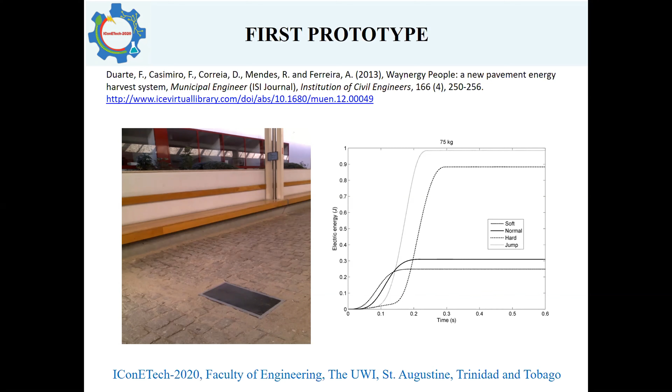In this figure, we can see a person with 75 kilograms and different values for the electrical energy generated by a soft walk, a normal walk, hard walk, and jump. And we published this in a Web of Science journal, before the project.

Then we developed a second prototype, this one for vehicles. It was called Waynergy Vehicles, also for generating electrical energy with different speeds of the vehicles. I show here a graph with the energy generated for different speeds, 10 kilometers per hour, 20, 30, 40, and 50. This kind of system is to insert in urban areas, and in Portugal, for example, the maximum speed is 50 kilometers per hour. And with this prototype, we published 2 papers.

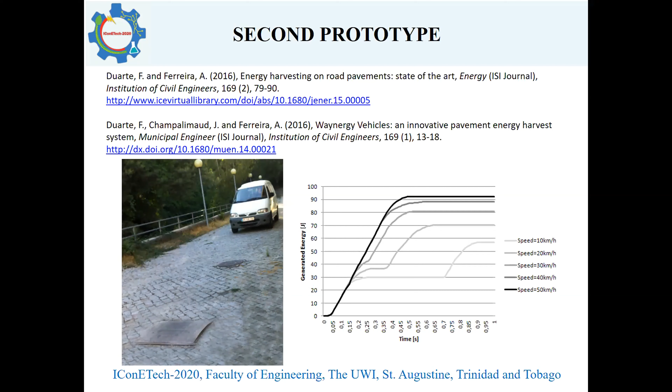Then there was another task of the project. We needed to develop a software tool for simulating the vehicle-road interaction. For what? To discover the best characteristics of the system without building them. We can simulate lots of different characteristics and choose the best one to build, to apply in a road later. This software was also published in the Engineering Computations journal. And I show here some part of the software.

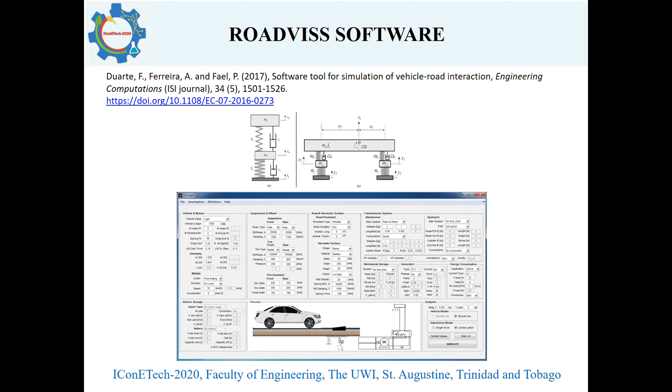Later, we had the opportunity to apply a real-world application in a shopping mall in Lisbon, Portugal, for people, with 25 modules of the Waynergy People that you can see in this figure. And on the right, we can see the electrical energy generated during 1 hour. It was an application in collaboration with the owner of the shopping malls, called Continente in Portugal. It's the top company that has shopping malls all over the country, and also in other countries, in Brazil and others.

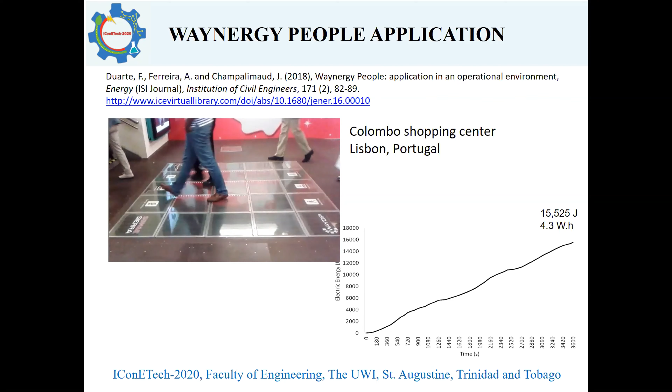Later, last year, 2019, we applied the Waynergy Vehicles in a city in Portugal, in Covilhã, with 10 modules. Each wheel passes over 5 of the modules, on the right and on the left. And in the graph, you can see the energy during 1 day.

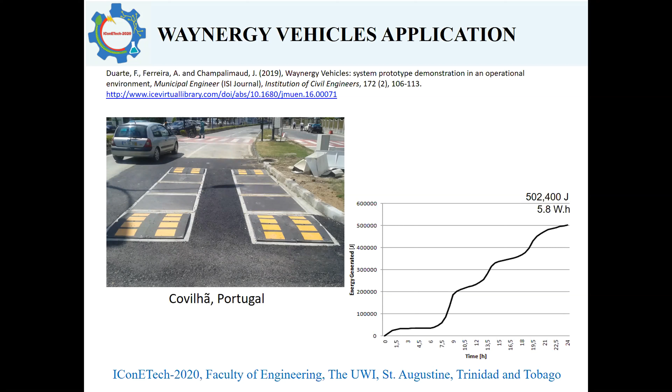Now we are in 2020. We are developing a third prototype, more efficient. For example, we have 100 modules inserted into the pavement consecutively, like we can see in this picture, 100 of this type of system. It can be used to substitute speed humps and speed bumps that are inserted into pavements to reduce the speed of the traffic. And we can use this and at the same time generate electrical energy for the municipality.

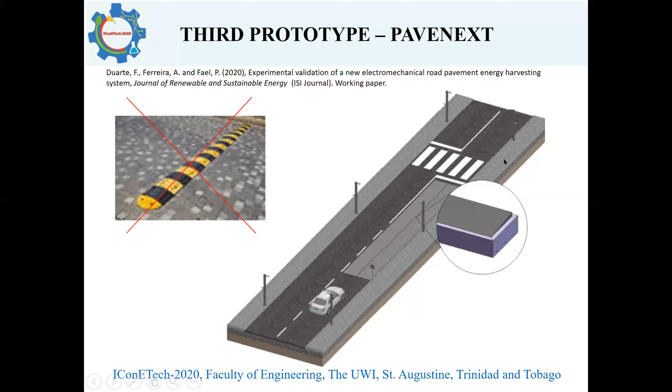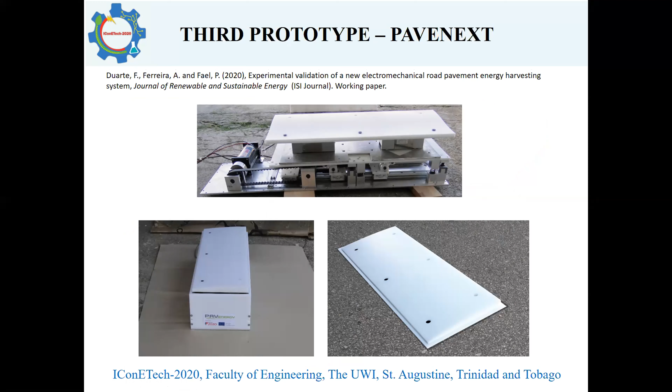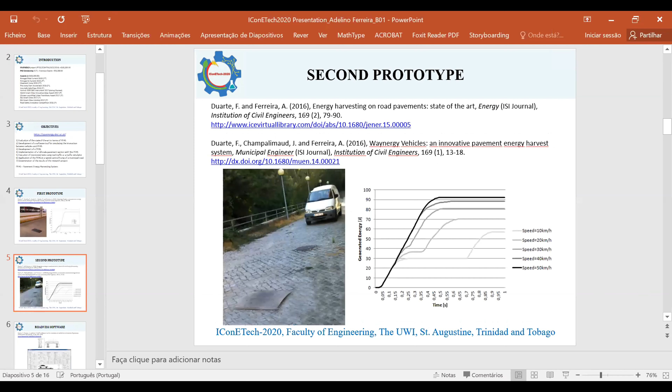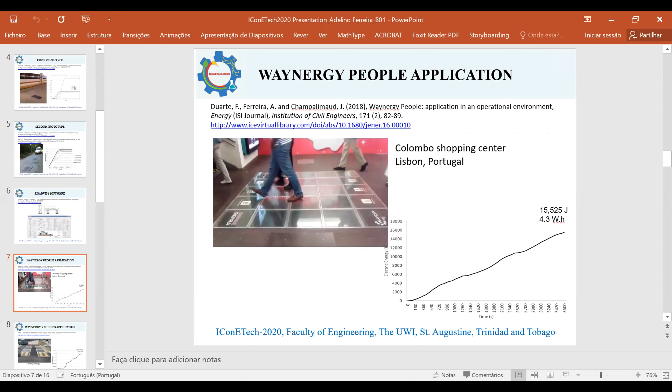In this case, it's not the bitumen. This is a system that we put, it's electromechanical. It works like a piston, and it is inserted in the pavement. So this is concrete, a concrete box. The system is inside the box, and the vehicle passes over it, and there are some deformations that make the rotation of the generator, and there are some details to increase the rotational movement of the generator.

Okay. It's not related to bitumen. Bitumen is outside the system. Okay. But there are kinds of systems like this with bitumen, by the temperature, but this is not the case. Okay.

Did you by chance do a life cycle analysis to account for the resources needed to build and install the devices? We are now installing the third prototype, and we want to test it for a long time to see, for example, the maintenance of the system, the cost of maintenance.

We already made a life cycle cost analysis. In 60 years, more or less, the system is paid, but without maintenance. With maintenance, which we need to check, it can be more years. We don't know yet. Okay.

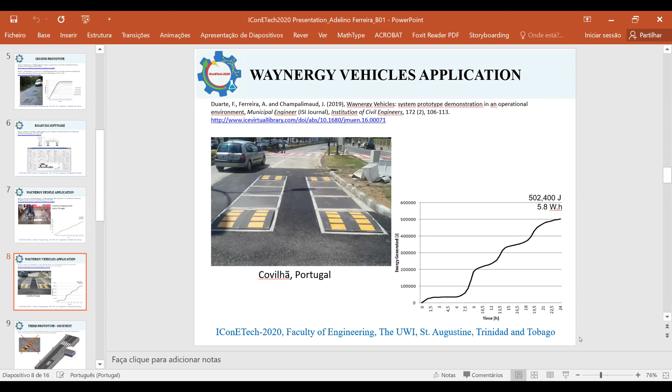And now I'm moving to the